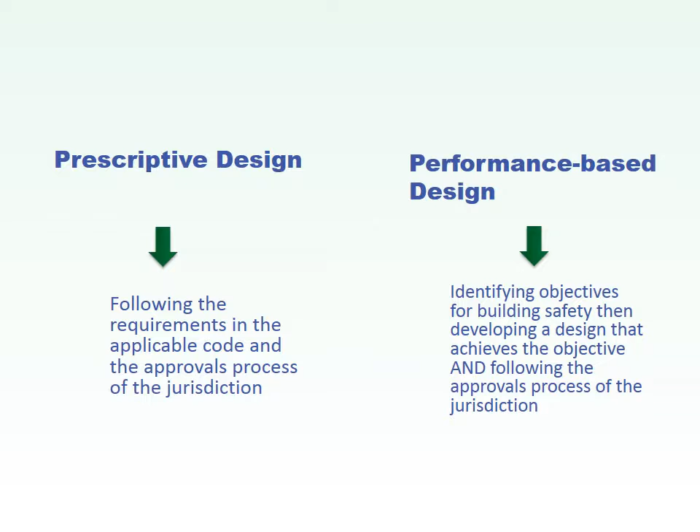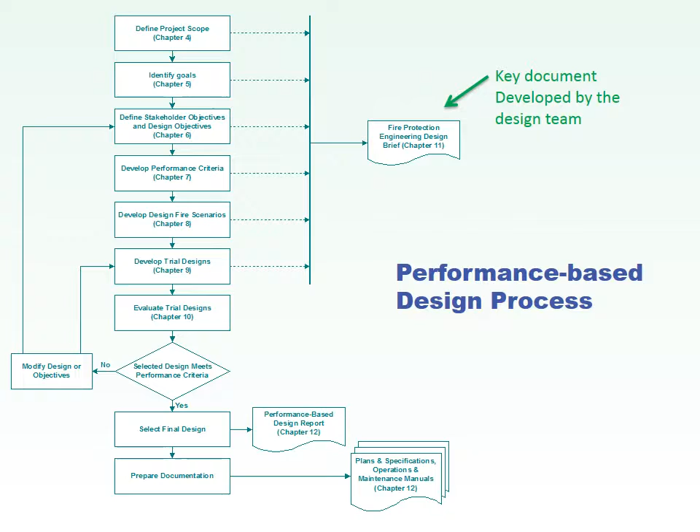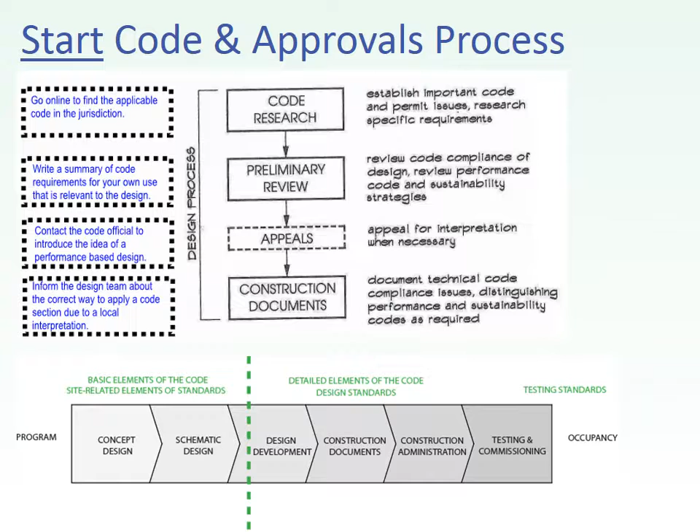The second stage, called the permit process, is when the authority having jurisdiction reviews the design, provides feedback, and finally allows construction to begin. This occurs after the design has concluded but before construction starts. The keys to this part of the process are proper documentation, following the authorities having jurisdiction's instruction, and remembering that the design team is responsible for safety in a design, not the approving authority.

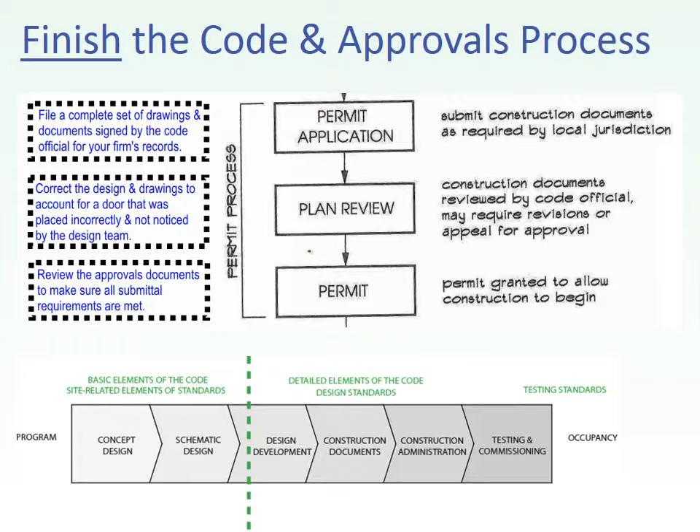During the construction process, the final stage of the code and approvals process, the designer is likely to interact with contractors. Contractors and subcontractors are the people and firms who do the work of making the physical building. They are especially important with respect to design-build active fire safety systems, like fire alarm and sprinkler. Finally, both the construction process and the code and approvals process will conclude with issuing a certificate of occupancy.

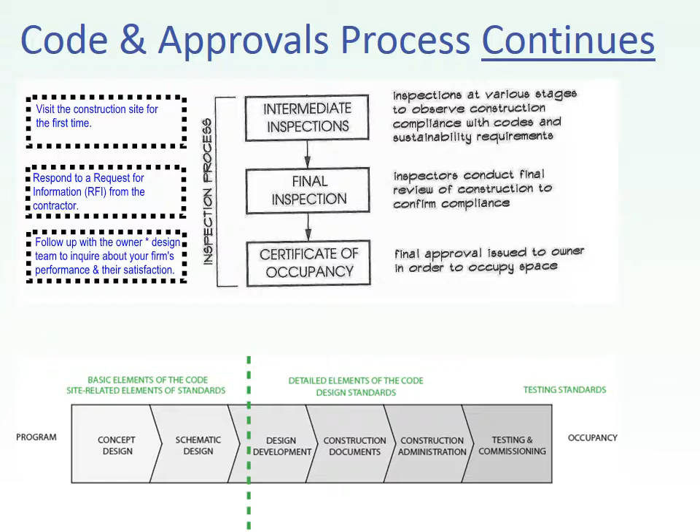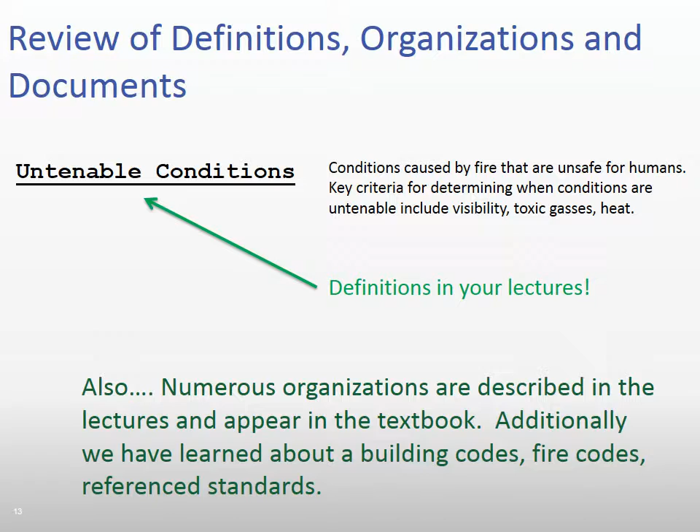Something that you've probably figured out during our module covering egress is that numerous requirements are based on the occupancy classifications of a space. You can't apply these requirements effectively if you're not able to determine the occupancy of a space based on its use. As a result, it is necessary to get comfortable with Chapter 3 of the NYCBC and the different letter occupancy classifications used in this code and other IBC-based codes.

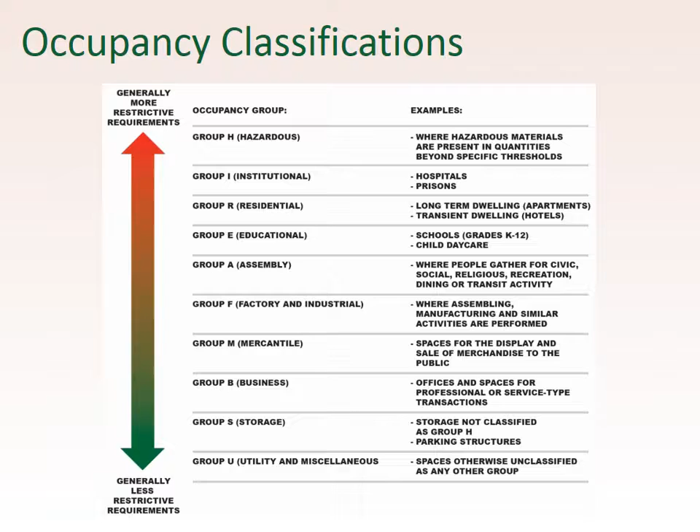Please remember that many of the occupancy classifications have multiple numbered subclassifications, like for example A2. These also affect their requirements.

Passive and active safety systems were each the focus of their own lectures, and as a result, you know they are important to study. Compartmentation and fire resistance ratings are good examples of passive systems. On the other hand, active systems include all the electrical and water-related fire safety systems. Additional systems within buildings, such as exit signs and emergency lighting, relate most directly to the means of egress that they serve.

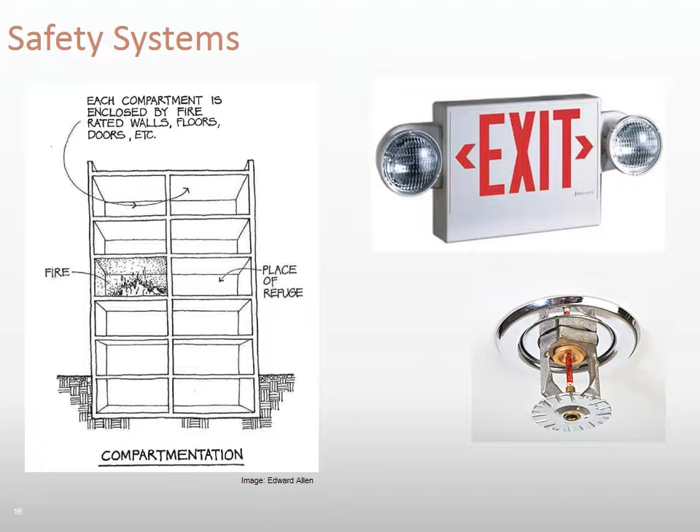For me, the number one rule of passive systems is that we use compartmentation to prevent the spread of fire and smoke from one floor to another. During our study of passive systems, we learned about the importance of fire resistance rated assemblies for construction type and compartmentation, as well as the fire protection rated assemblies for opening protectives. An assembly is all the pieces working together and listed for that use.

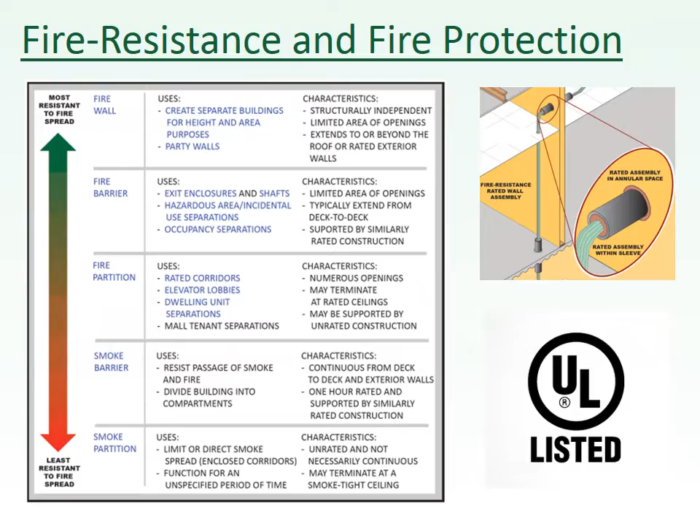By now, everyone should know about the different types of buildings addressed in the code, especially high-rises and buildings with atrium. The same is true of the different types of existing projects like repairs, alterations, additions, and change of occupancy. Please know when your project includes these and know their precise and very measurable definitions. The codes are very good at providing precise definitions.

We have studied how to use egress requirements and the progression of increasing safety to organize a building or a floor plan. As interior designers, you will often work in tenant fit-outs and existing buildings. These are spaces where the main egress strategy is likely already in place, but this does not make it any less important for you to understand how egress works. We learned to calculate occupant load and had opportunities to practice it in both Project 1 and the homework assignment from the Means of Egress module.

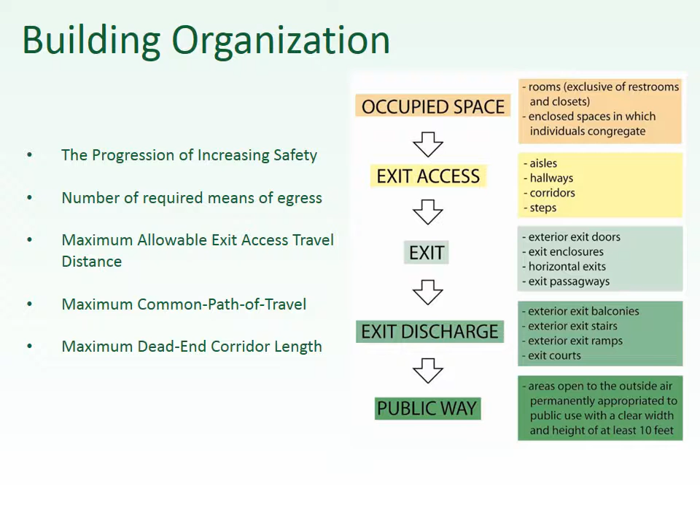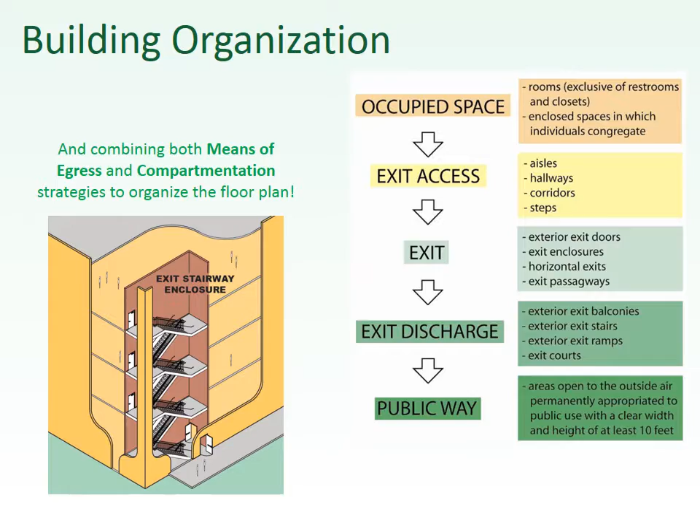Another part of our discussion of egress was combining egress with passive strategies, specifically compartmentation, as in the case of an exit stairway enclosure. I hope everyone enjoyed the lecture on egress. As I've said before, it is one of my favorite things to work on, and I hope as a teacher I can be useful for you on this subject.

Now let's look at the egress assignment together. Here is the floor plan and the table of room areas from the proposed design in that assignment. The first thing I'd like to point out is the tidy separation of gross and net occupant load factors in this floor plan. The hotel component, shown in red, is a gross residential occupant load of 1 person per 200 square feet. Notice how all areas are included. In the assembly space area, a variety of net occupant load factors have been applied to individual spaces, and these have been shown in blue.

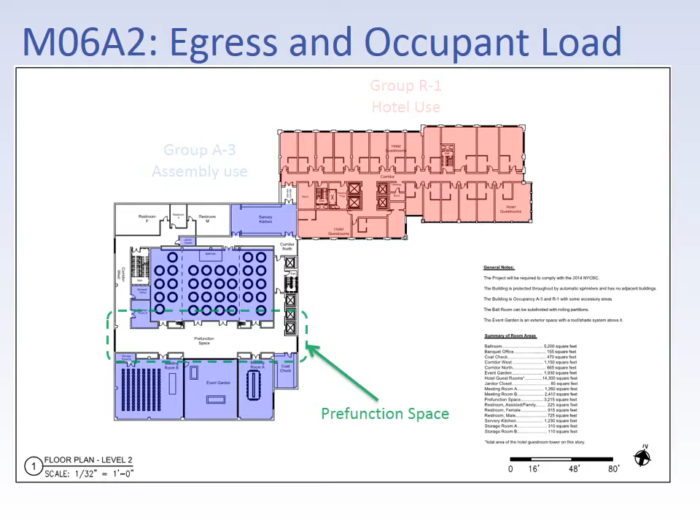Notice how circulation and core spaces in an area using net occupant load factors do not need an occupant load. While pre-function areas may contain occupants at certain times, these occupants are on their way in and their way out of the assembly spaces served by the pre-function space. In most cases, assigning an occupant load to the programmed space only is sufficient. We can use the term non-simultaneous use to describe the way pre-function spaces, circulation spaces, and restrooms work in areas where net occupant load factors have been applied. The people are either in one space or the other, so we only need to count them one time.

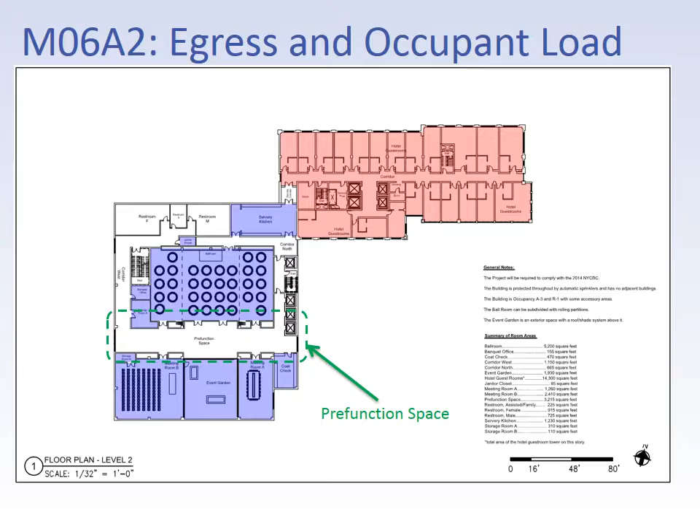We can take the areas provided and determine occupant loads for all of the spaces on this table. The nice thing about the occupant load for the hotel component is that because it is a predictable and normal sort of space, with one specific use, we are allowed to apply a single gross area occupant load factor from the building code. As a result, it is one quick calculation for that whole area. The assembly rooms, based on the description in the assignment, should all be assigned an occupant load based on 15 net square feet per person.

The occupant loads assigned to these two spaces and their respective occupancy classifications of Group R1 for the hotel and Group A3 for the assembly area are the starting point for taking a critical look at means of egress in this design. Remember that occupancy classification informs the key requirements for maximum travel distances and the minimum required number of exits. The first thing that should jump out at us in this floor plan is that there are 2 exit stairways provided from the assembly area, but that space has more than 500 occupants, so a 3rd exit from this area of the story is needed.

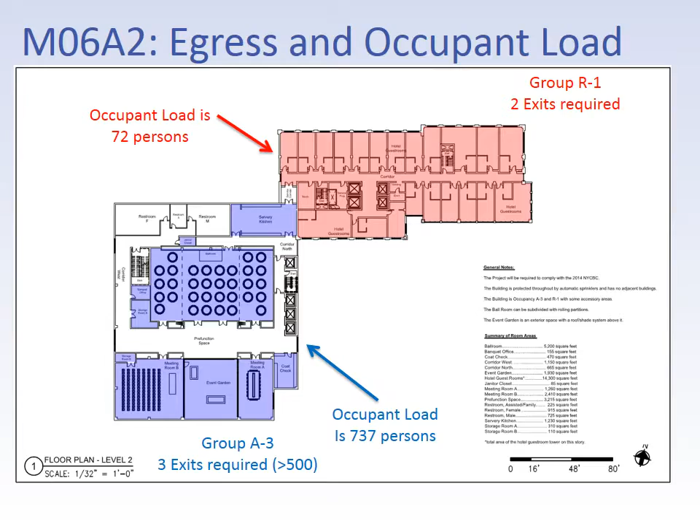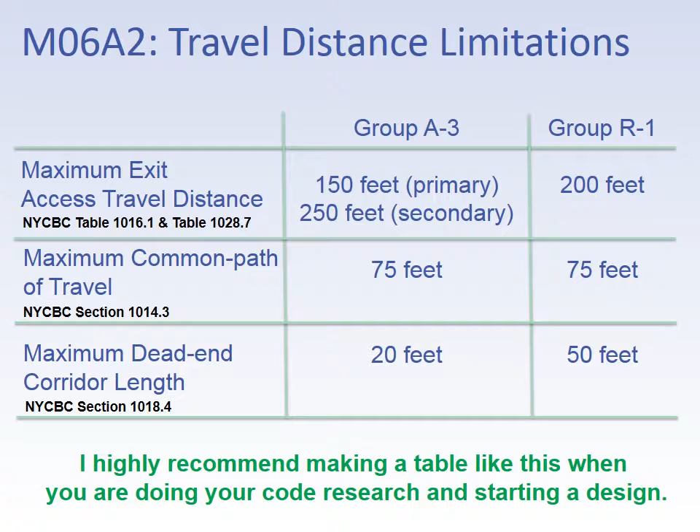I highly recommend making a table like this when you are doing your code research and starting out on a design. The assignment asked you to identify the problems with egress compliance in this design. Here are the locations of the answers for the assignment, and this presents us with a good chance to review them and go through important egress concepts from the lecture and the reading.

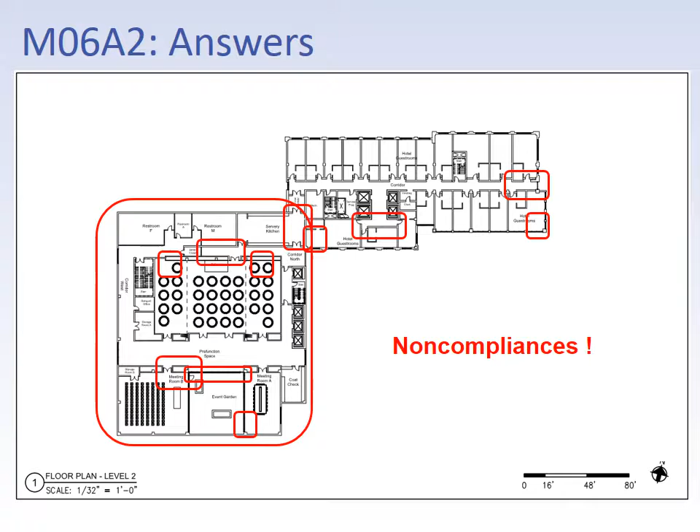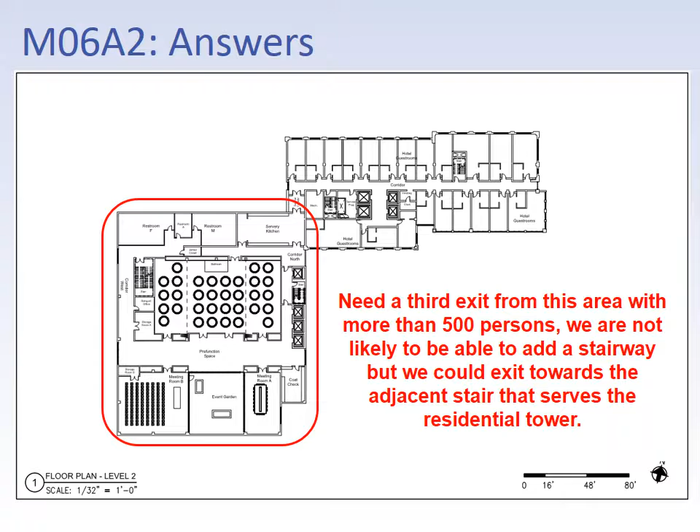As I previously indicated, a 3rd means of egress is necessary. In the role of interior designer, it would be difficult to add a stairway without input from the architect and engineer, so perhaps we can provide a route to the nearest available stairway on this level that is not currently accessed from our assembly area. Unfortunately, the kitchen is currently in the way of this means of egress, and because it is more hazardous than adjacent areas, it is not appropriate to have a kitchen as an intervening room.

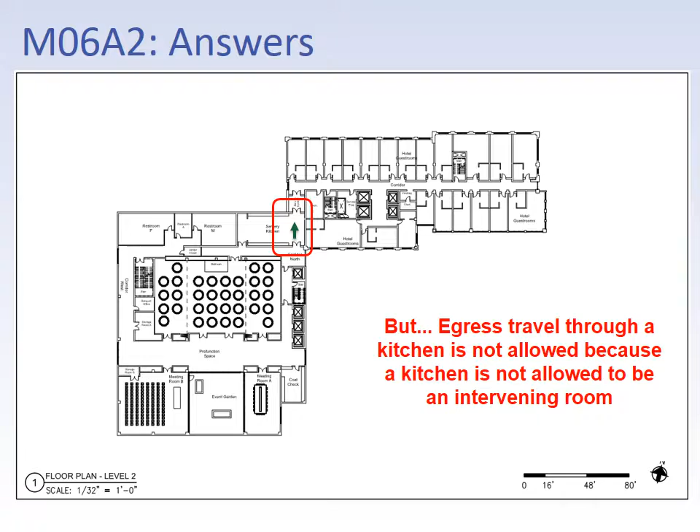Hopefully you also found that there are some dead-end corridors that are in excess of the maximum allowable length for this condition. Remember that the dead-end corridor limitation is about limiting the distance a person can travel in error on a path that does not take them towards an exit. The maximum allowable length for dead-end corridors is based on occupancy classification.

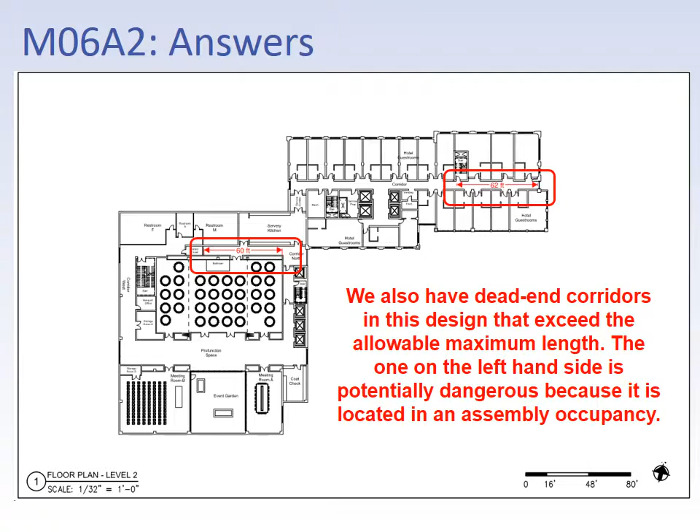Zooming in for a moment on the residential component, there are instances of common path of travel that exceed the maximum allowable length for this dimension. Common path of travel is usually the measurement of travel towards an exit, but before an occupant is able to choose between two different exit options. Often this will happen in the same area of a floor plan as a dead-end corridor, but the two are not necessarily related. Common path of travel can be more challenging to correct.

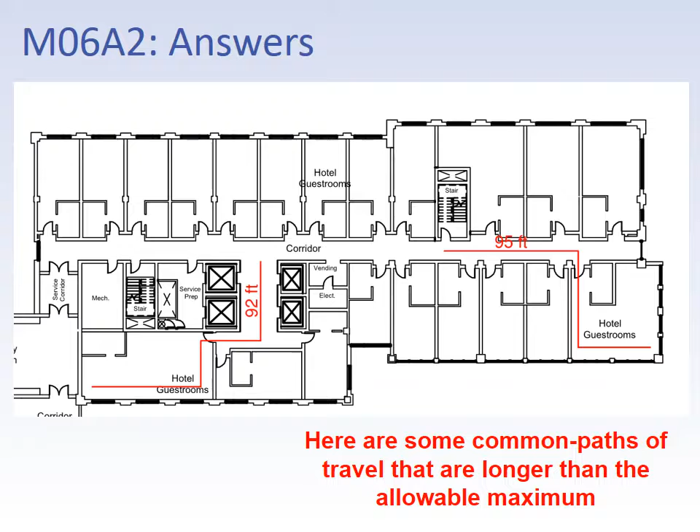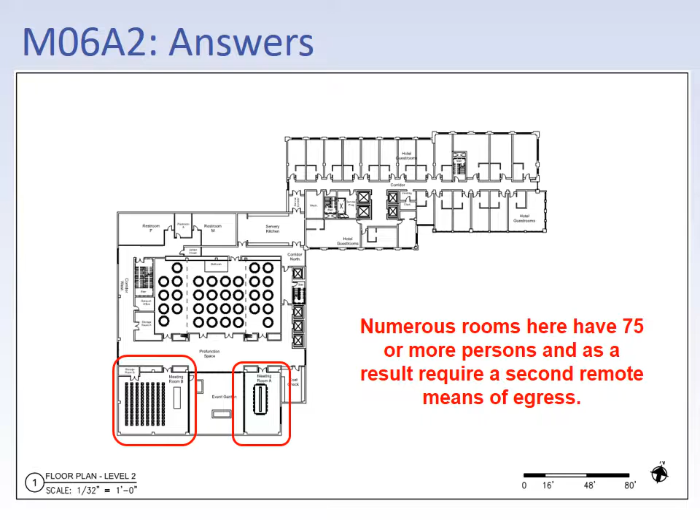Numerous rooms in the assembly space have an occupant load of 75 or more people, and as a result, a second remote means of egress is required from each of these spaces. Currently, there are spaces in the design where this is not provided. As a note of caution, the NYCBC applies a maximum of 74 persons before an assembly space needs a second means of egress. In many other jurisdictions and in the model code, this maximum number is 49 persons.

The event garden is shown as an exterior terrace. Exterior spaces on the above grade levels of a building also require egress back into the building and towards stairways in the same way an interior room would. These exits should probably be located to provide direct access to the building interior through the pre-function space in order to prevent the complexity of exiting through adjacent rooms. This was not shown on the proposed design.

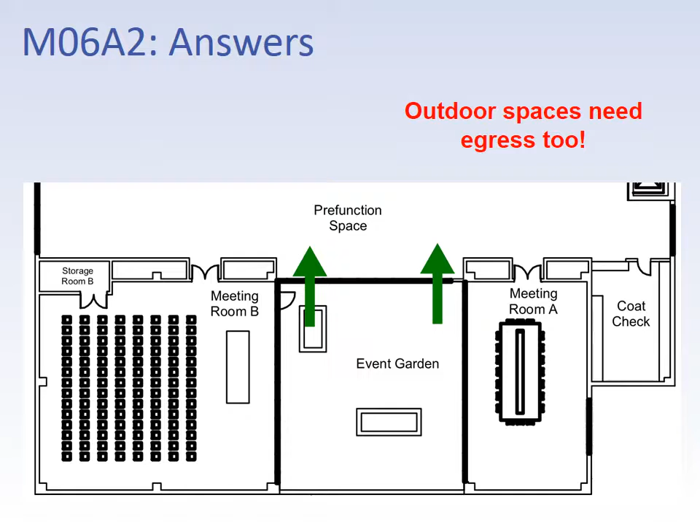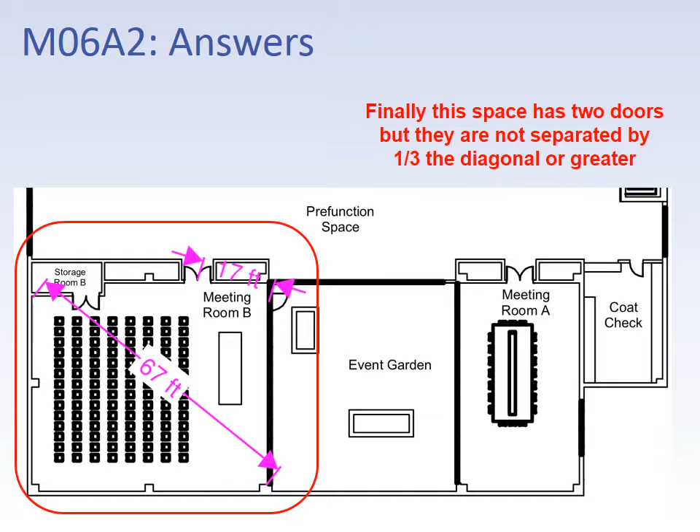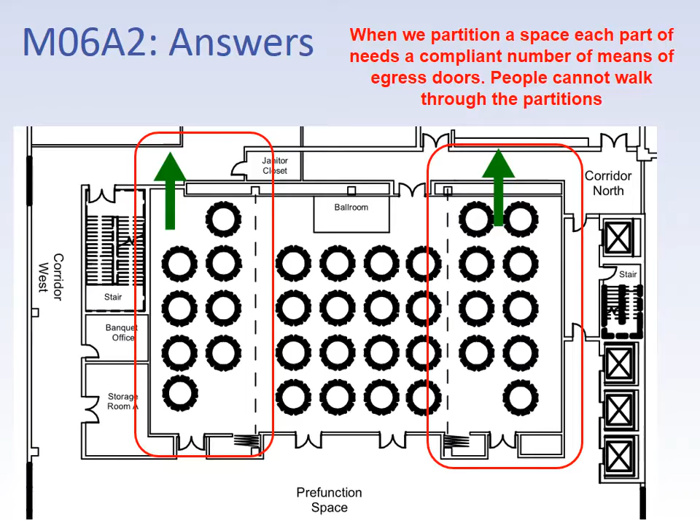The addition of the following egress routes would correct these egress issues and are probably possible in the context of this design. Remember that the kitchen wall locations also will have to change so that circulation and egress do not pass directly through the kitchen if we are intending to use a route north as one of our ways to exit the assembly space.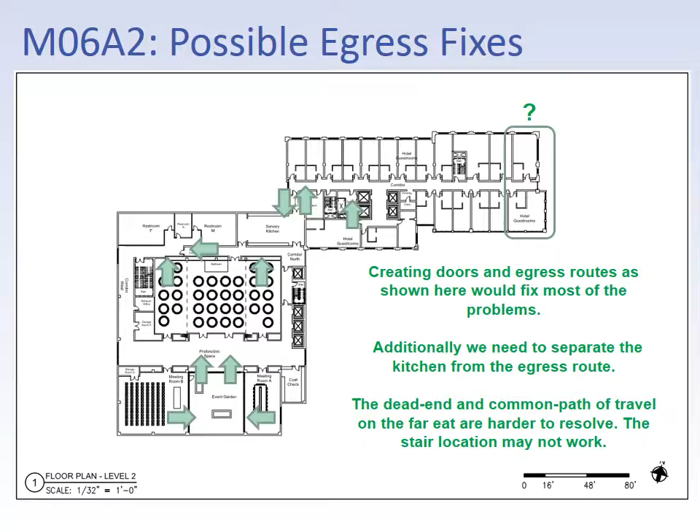Please take another moment to consider all the things we looked at in the process of doing this assignment. The assignment involved calculating occupant load using Table 1004.1.1 from the NYCBC and got us thinking about using means of egress to organize the floor plan of a building.

Now we can move on to Project 1. This was an opportunity to look at numerous different ideas from several different lectures and apply them to a single design situation. This project was harder than anything you will find on the examination, and I wanted to give you an opportunity to try to work through multiple steps in the compliance process and maybe use the internet or reference documents to track down some answers.

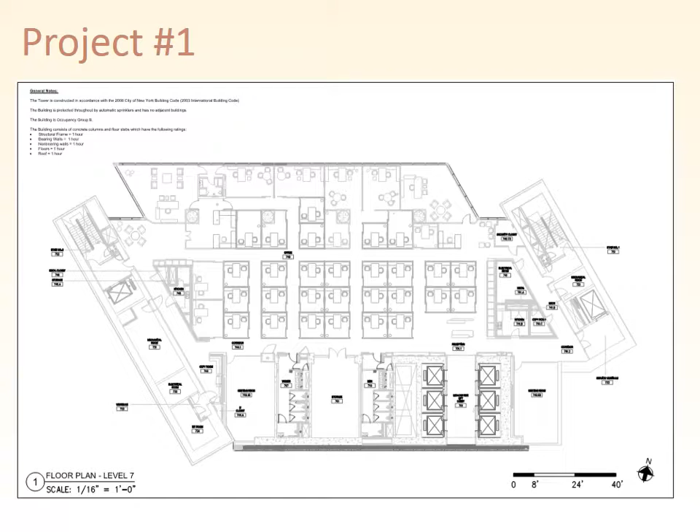You'll remember that Project 1 started with this existing story from an existing office building. The floor plan includes key information about conditions that will not change, but also the floor plan design that is proposed to go away as part of this project. The story is being converted to a conference center that can be rented out independently of the stories around it. Your design firm has done a preliminary layout that is shown here.

Notice the things that don't move when you do a tenant fit-out. Elevators, exit stairway enclosures, and restrooms are difficult and usually expensive to change. So normally they don't change most of the time, and this project is no exception.

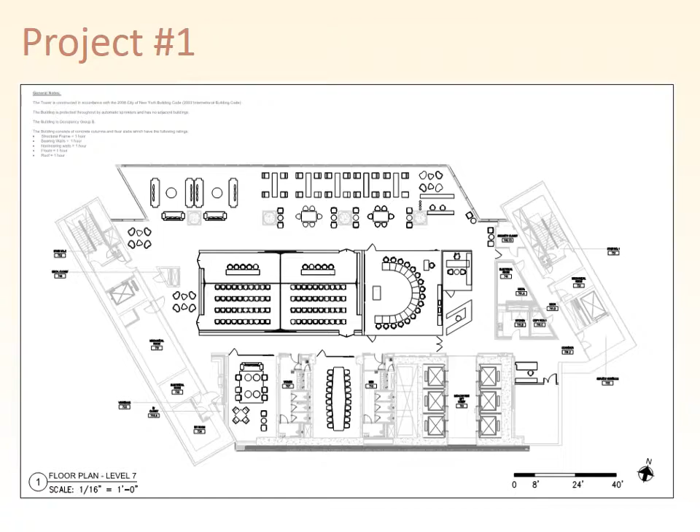In Project 1, I asked you to provide as much information as possible in terms of codes compliance. A truly complete answer to this request would have started out with recognition that this is no longer a Group B office occupancy. Look at all those large seating areas and open spaces that can be used for gathering people. This is an assembly occupancy area. Neither the adjacent floors, which are separate tenant spaces, nor what the project used to be used for are going to matter in terms of the new design.

We are also changing the configuration of the space but not adding more floor area. This means the code defines the project as an alteration. Occupancy group has also changed, and I apologize for being a bit sneaky with this, but did anyone think to do a maximum allowable height and area calculation as part of their review of the design? The instructions gave you the information needed to determine this, and it is a pretty standard step in any change of occupancy project, but it may not seem like the most obvious thing to do because it doesn't involve going straight into floor plan analysis.

To use a new occupancy group in a building, the construction type, presence of sprinklers, and other features need to allow for that occupancy to be on the floor where the new design is proposed. If it wouldn't be safe and allowable to put this proposed occupancy on such a high floor in new construction, in this case the 7th floor, then it is not permissible to do so in an existing building. With that in mind, let's take a look at the occupancy calculation that would be involved here before we go on to the fun part of looking at the floor plan in Project 1.

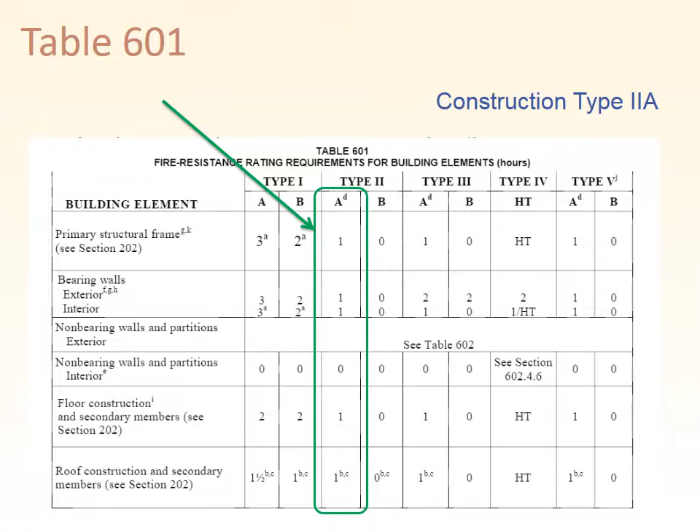The information provided in the Project 1 assignment gave us the minimum as-built fire resistance ratings for the structural elements of the existing building. Remember that to define the construction type, it is necessary to check all the structural elements and that they meet the minimum fire resistance for their respective element for the construction type shown in Table 601. In this case, the building turns out to be construction type 2A. This is an existing condition and a condition that will continue with the new design.

We know our construction type of 2A and our occupancy group of A3, and this allows us to use Table 503. First, we locate the tabular values for maximum height in feet, maximum height in stories, and maximum area per story associated with the combination of the existing construction type and the new occupancy classification. In this case, the table would allow the building to be 65 feet tall, have 6 above-grade stories, and have a maximum area per story of 17,500 square feet. We know these figures are going to increase, though.

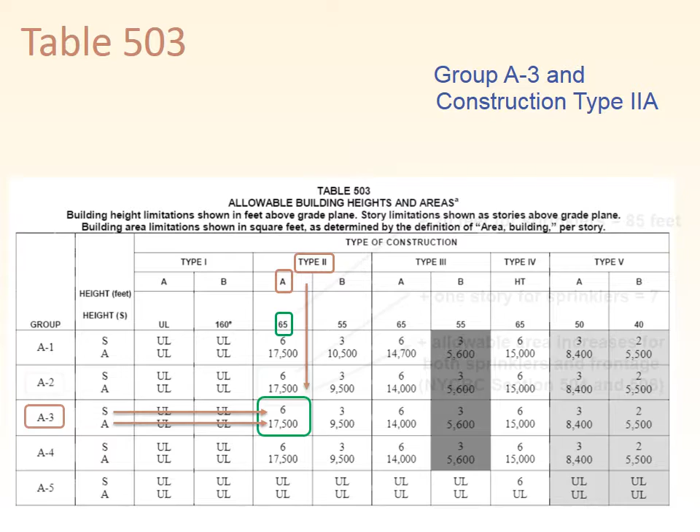Now we apply the increases allowed in sections 504 and 506 of the NYCBC. An additional story is allowed due to the presence of sprinklers. This is what makes having an assembly occupancy on the 7th story of the project as described permissible per the code. If the proposed location of this project was 1 story higher in the building, the whole project would not be compliant.

The maximum allowable area per story for group A3 must also be met by the proposed use. The allowable area per story will increase from this tabular value due to the presence of sprinklers and frontage. Our building floor plan is relatively small, so this does not affect the assignment, but please review the previous lecture materials on these increases in area and get comfortable with the location of the code section describing these increases.

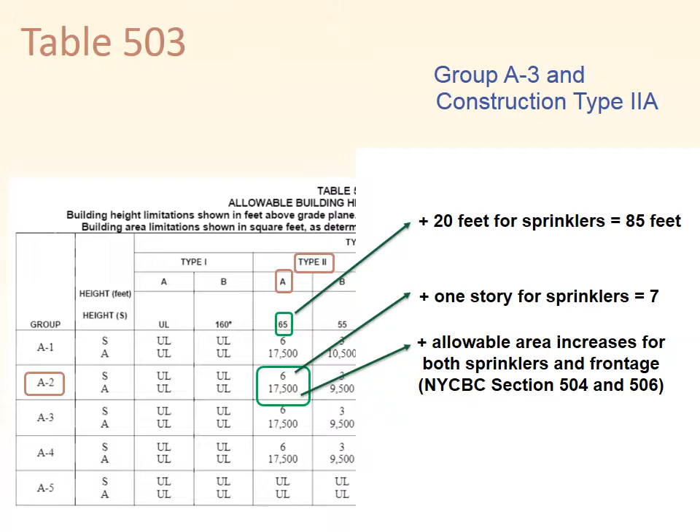Moving on to the floor plan. Let's look at occupant load for the proposed design. If you did this in less detail when completing your assignment, that is totally fine. After all, the description in the assignment of this design is that it is an initial proposal, rather than a fully developed approach coming from the design team. First, we divide the story up into areas of similar use with special attention to the large rooms to make sure that they have enough exits for the occupant loads present within them.

Everyone looks at buildings a bit differently, but these are the areas I would pick and their respective measurements. You didn't have to get this detailed on the measurements. A bit of rounding is fine. The big conference rooms are clearly important spaces. Notice that one of them can be divided into 4 parts by partitions, so if we had wanted to do the occupant load for each one of those 4 partitioned areas separately, we could also have done that.

Then there is the big waiting room or breakout or lounge type space on the north side of the project, all 3,700 plus square feet of it. It would be a good idea to get feedback from the authority having jurisdiction about this space, because this use doesn't appear to neatly fit into any of the classifications offered in NYCBC Table 1004.1.1. Because I see this primarily as a pre-function space for the conference center, I would not feel obligated to put a dense assembly use occupant load in this space. However, the code official or fire marshal may disagree.

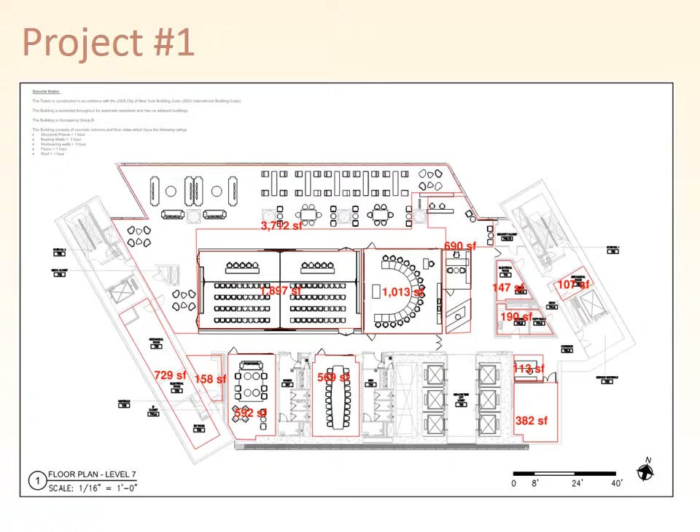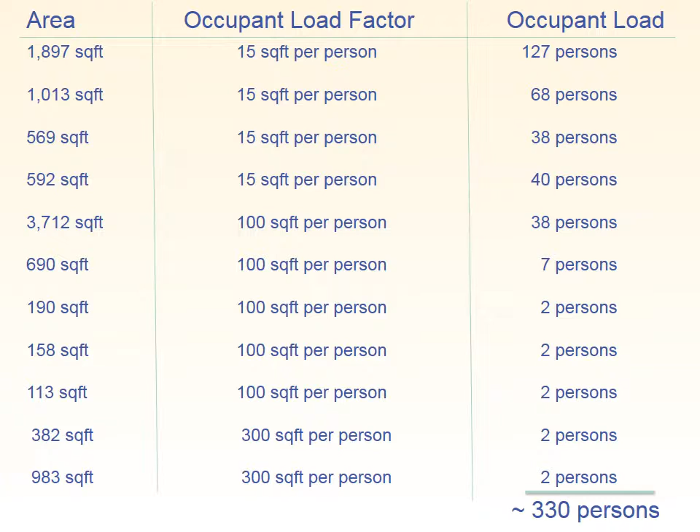Here is the application of the occupant load factors to these areas as I would have done it. Note that we have lots of 15 square feet per person and lots of 100 square feet per person. And here are those same occupant loads shown in context. This type of information is often shown on a life safety or code compliance floor plan or diagram in the set of design drawings.

Notice that the remaining corridors, not shown in any of the areas, could have been treated as either one person per 100 square feet or as a non-simultaneous use space and not loaded as I've shown here. Either is a good answer in your assignment, and in the actual project, it could depend on the preference of the authority having jurisdiction.

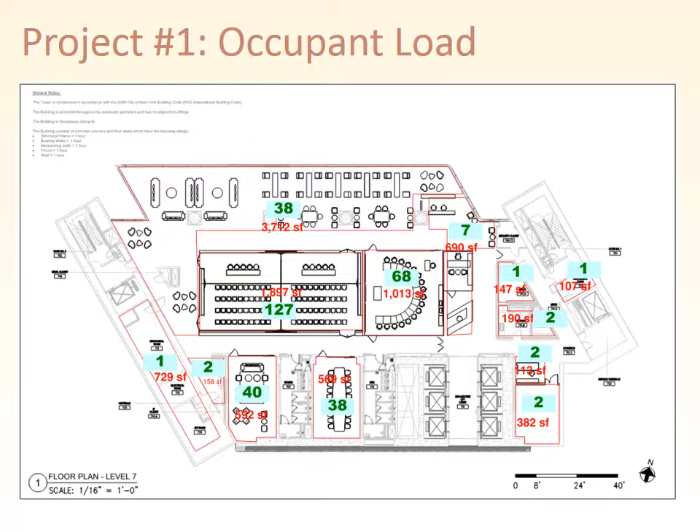Now let's look at the layout criteria for manual fire alarms and portable fire extinguishers. You can find requirements for these devices in the building code, and in some jurisdictions, layout criteria for these devices will be found in either the building code or the fire code. The NYCBC references the requirements from NFPA 72, a reference standard, for the alarms, and NFPA 10, another reference standard, for the extinguishers. This is a common approach for building codes, and I wanted you to see it in action.

Manual alarms are an active fire safety system and part of the fire alarm system. The building may not require these under the current code, but if the owner and fire alarm system designer decide to include them, and they frequently will, then the spacing must meet specific requirements. The spacing criteria, as discussed previously in this class, are to provide alarms within 5 feet of the exit doors and to distribute alarms on the floor plan so that no area is more than 200 feet of travel distance from an alarm.

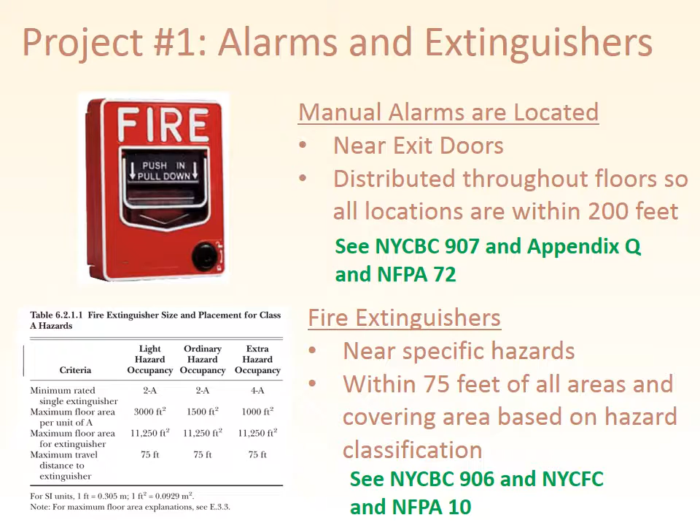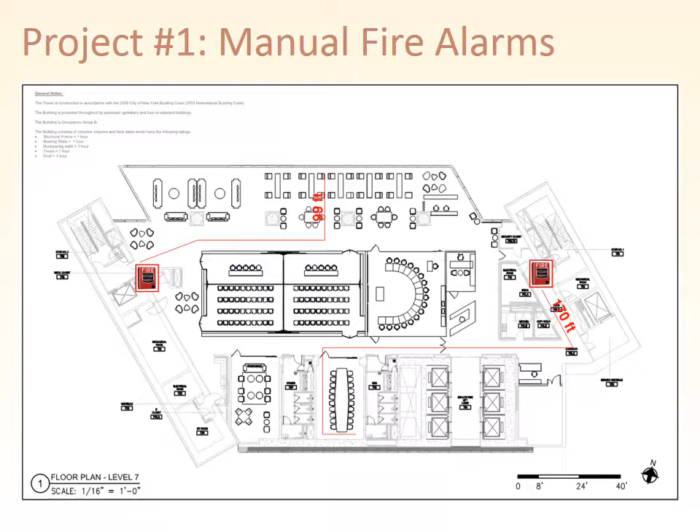Also, we see that 75 feet of distance is not nearly as far as the 200 feet of distance on the previous slide. So we're going to need to find useful locations for extinguishers that are on walls that are visible but not on the nicely finished walls or located such they would impede doors. There are lots of potential right answers here, and I came to the conclusion that about 5 extinguishers are needed.

Note that when it comes to area coverage per the little chart, if we have 5 extinguishers times 4A for each, we would end up with 20 units of A, and that is certainly enough extinguishing capability to cover this area. So you could get a layout to answer the assignment on this floor plan without going into detail with that specific criteria.

Note that one of the kitchen extinguishers is inside an enclosed kitchen and can't be seen from the adjacent corridor. As a result, we should not count that extinguisher towards the extinguishers that are within 75 feet of the building spaces, since the occupants can't see them and use them.